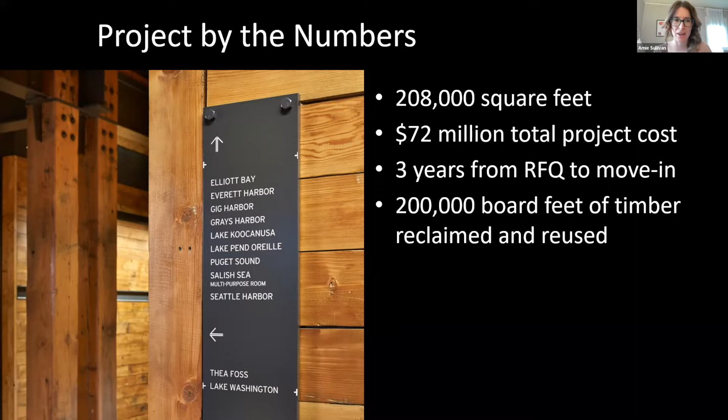So at a high level, this project is just over 200,000 square feet. $72 million is the total project cost, 3 years from when the RFQ hit the streets to move-in. So it moved at a really fast pace. And my favorite stat is 200,000 board feet of timber reclaimed and reused on this project.

I don't nearly have enough time to talk about all the fun details of this project, so my strategy will be to talk fast. Welcome questions at the end or after the meeting if you want to reach out to me. The other thing is I want to make sure that in all the details, the real main points are highlighted that I'll touch on. So I'm going to make those super obvious as we go through the presentation.

I want to talk about the commitment from the team, which was key. I'm going to share the sacred strategy to maximize the reuse of timber and limit the waste. I'm going to talk about the inventory-based design process and the iterative nature of that, which is important to be aware of. And finally, strategies for designing and detailing for efficient fabrication and construction, which is especially important for this kind of material.

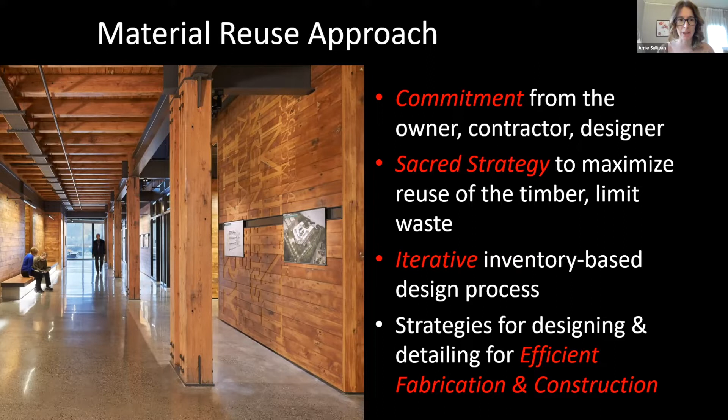So to start out with the team: the owner is the GSA, the tenant is the Army Corps of Engineers, our contractor was Sellen, ZGF was the architect, KPFF did civil and structural, and Flack & Kurtz did the mechanical design. There's a whole other great sustainable story around the mechanical on this project, which I won't touch on at all.

So the 3 points I want to make here: number one, this project was advertised as an adaptive reuse. The language in the RFP said that this project was to reuse the existing 1940s warehouse that occupied the site at the time. That language from the owner really set this project in motion in the direction it ended up in. The second point is our team's response to the RFP included a design that committed to reusing that timber, not just as finishes or furniture or site elements, but as the structural system in the new building, which was ambitious and exciting and a really big deal.

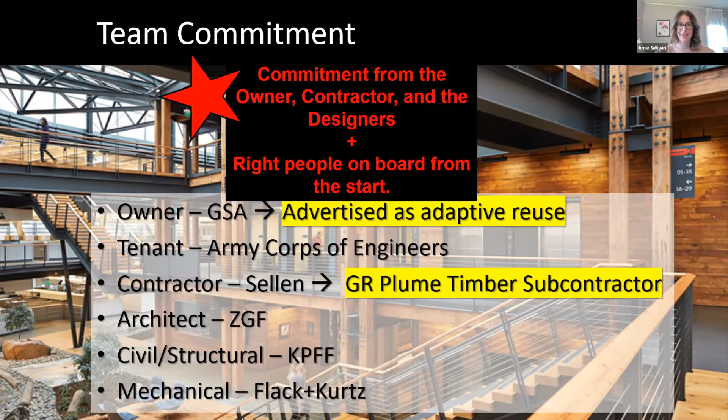The last thing I want to point out here is the day the project was awarded, Sellen brought on the timber subcontractor GR Plume. The point here is that this project would not have been possible without the right players in place at the very start, and having the timber sub on board at the very start was super important. So big point here: the commitment from the team and having the right people from the start was super key.

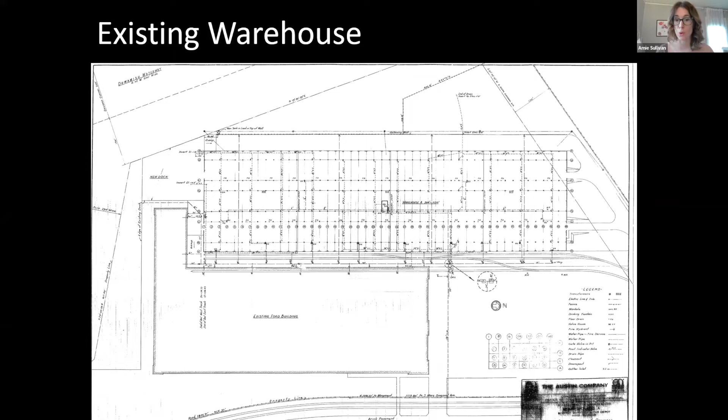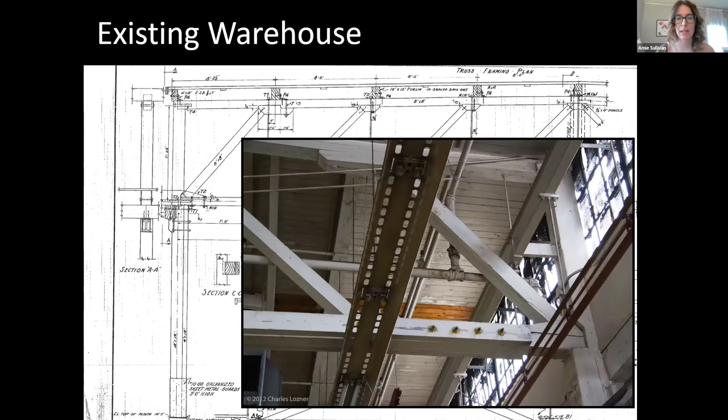Next I'm going to talk about the inventory-based design process, starting with the sourcing of the timber. The thing that was really unique about this project is it wasn't that we decided to use reclaimed timber and then tried to figure out where it was coming from. We already knew what the source was. So from the very start, we could see what we were working with. We reviewed the existing plans, figured out what members were in this building. We toured the site to check out the condition. And at the end of this process, we had a tally of all the members available to us, which is kind of a unique starting place.

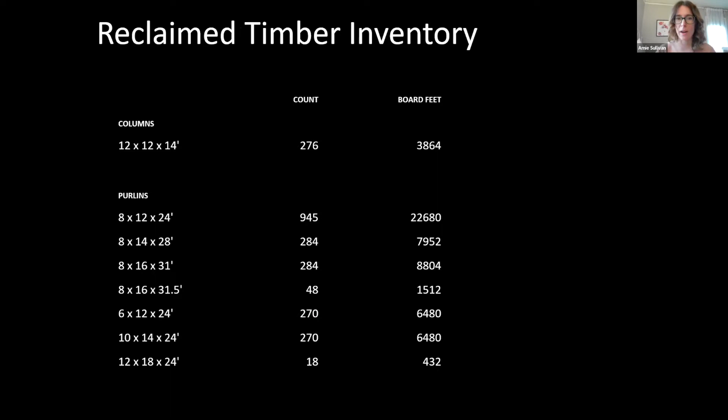I think an important step in the process is to make sure that you can source the material that you're wanting to use. So here is the sacred strategy: when you're reusing reclaimed timber, especially these big pieces, it's really important to not mill them down to smaller sizes because there's so much waste in that process. These big timbers have deep checks in them.

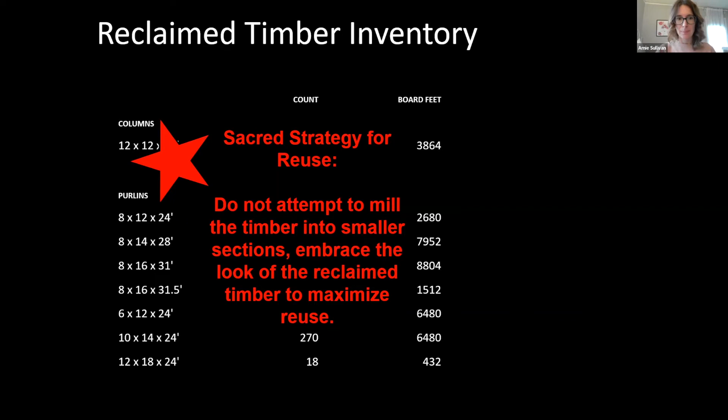As soon as you start cutting it up, you end up with these little pieces that are just wasteful. So you really need to embrace that timber in the form that it's in. So right in SD, we took this list of members and we started to figure out how these pieces of wood were going to work their way into our design.

The system we came up with is a 3-story structure that has a 4-inch concrete topping supported by 2x6 timber decking, which was also reclaimed from the existing warehouse. We've got timber purlins, those are 8x16. We have some steel beams to help us make some nice long spans and create open spaces, and then it's all supported by reclaimed timber columns.

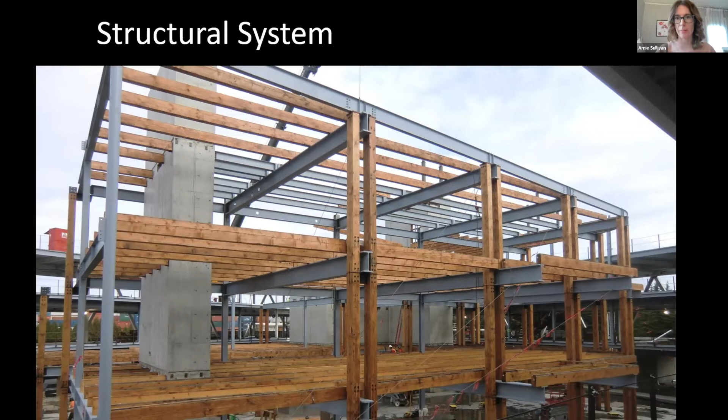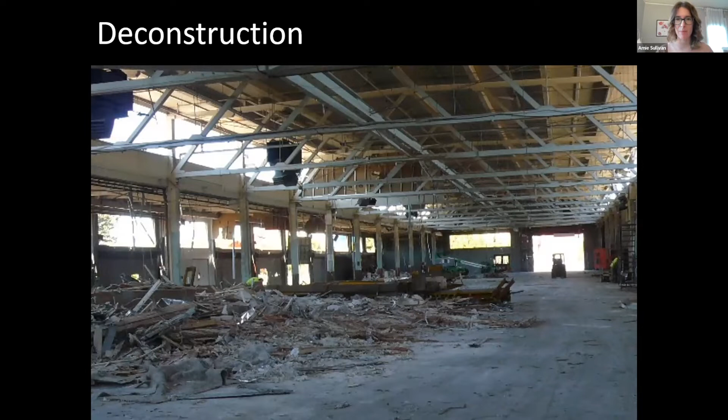Really early on, even apart from just the construction schedule, we needed to start the deconstruction so we could really understand the material we were working with. At this point, we had a list of member sizes, but we really didn't know anything else about the material.

One thing to note is, of course, when you deconstruct a building it's way different than demolishing it. But even so, there's some damage to the members coming out. So one thing we took into account from the start is knowing we wouldn't get the full length from the members, that we would use something shorter so we could cut off the ends where those existing connections were happening, where there'd be some damage and bolt holes. So to have a clean member, we cut some off from the ends, and that helped us set our grid spacing from the beginning.

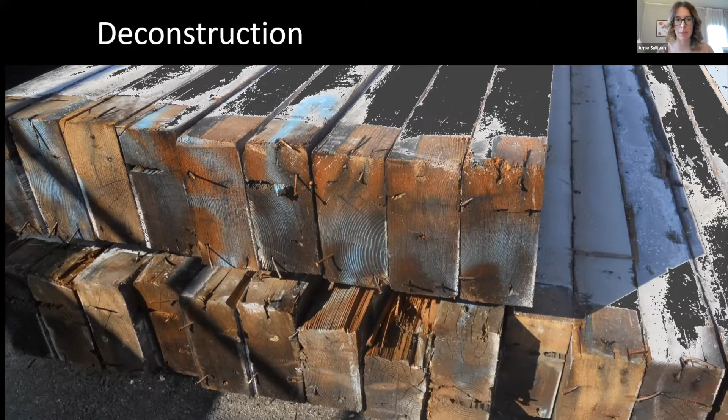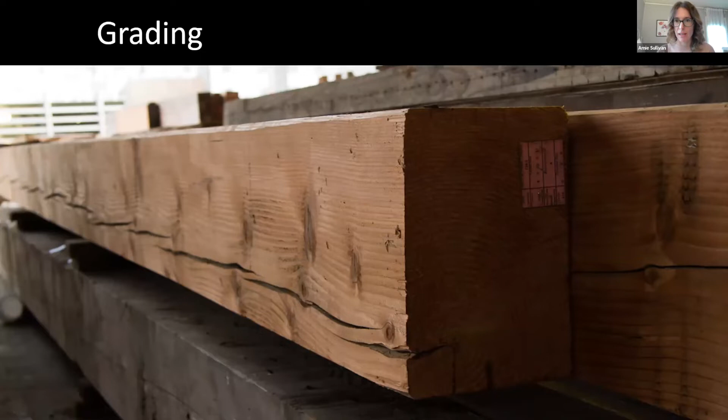So the next step was grading, sorting, and measuring this material. Every member was graded so we understood the strength of the material. It all graded really good. This material is like second growth timber, not old growth. All Douglas fir, it graded out as number 1 and select structural for the most part, which was fantastic.

All the members were tagged with their grading and their piece number and their measurements. And at this point, we had another spreadsheet to work with, in this case a much bigger spreadsheet that had all the details for each piece. We had the length, the height, and the width, but also some really intricate measurements that are kind of unique to this reclaimed timber material, which I'll touch on a little bit more. So we had a lot of detail for each member.

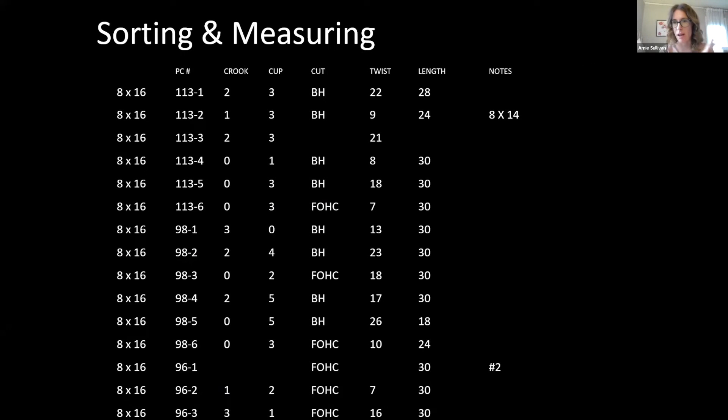The next point I want to make is this idea of an iterative process. We have two parallel paths happening at the same time. On one hand, we're taking stock of this inventory and understanding what it is. On the other hand, we're moving forward with a design based on assumptions about what we think that material is. So you can imagine we need to check in along the way to make sure our assumptions are consistent with what we're finding out about this material. And of course, there's going to be some cases where we find something that didn't work as planned, and we encounter some hurdles.

One of the big hurdles we came across was when we started doing our calculations to figure out how we needed to space these members out in order to carry the loads. Our calculations showed we needed to space them at 4 feet on center. However, we only had enough material to space them out at least at 5 feet to cover the square footage.

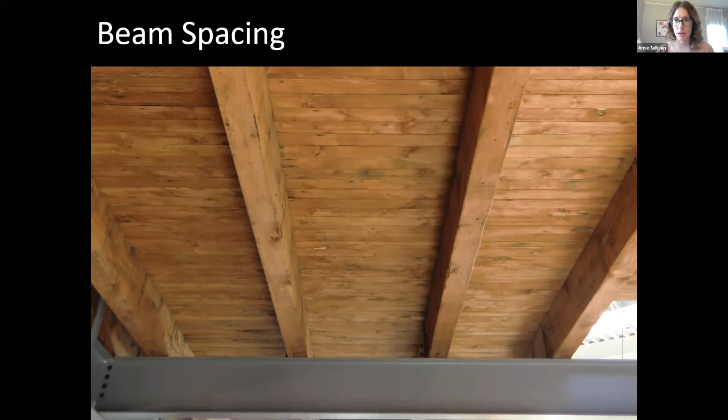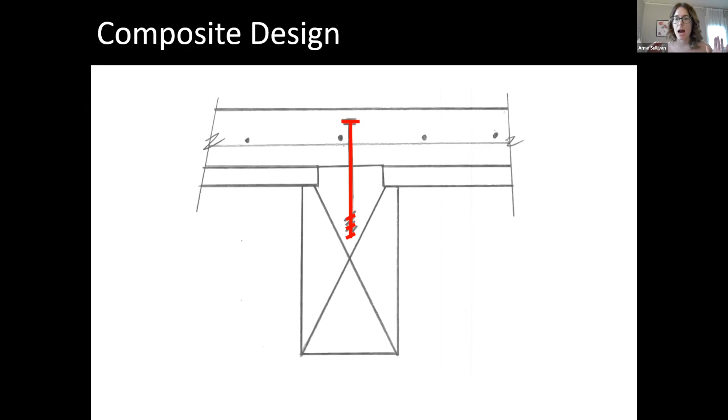So the team came together and talked about the options to overcome this hurdle. What we decided to do was make the timber composite with the concrete topping, which was already in place in the project. We talked about a lot of different ways we could do that, and what we decided on involved just adding a lag screw from the timber beam to the concrete to make those two materials act together. The point I want to make here is this iterative design process creates these hurdles or unexpected situations, and we really need the whole team's input, and we have to unfold that whole process to find the best solution.

So in this case, the solution really prioritized what made sense from a construction standpoint and a fabrication standpoint, and that was deemed to be the best solution. From a design standpoint, this

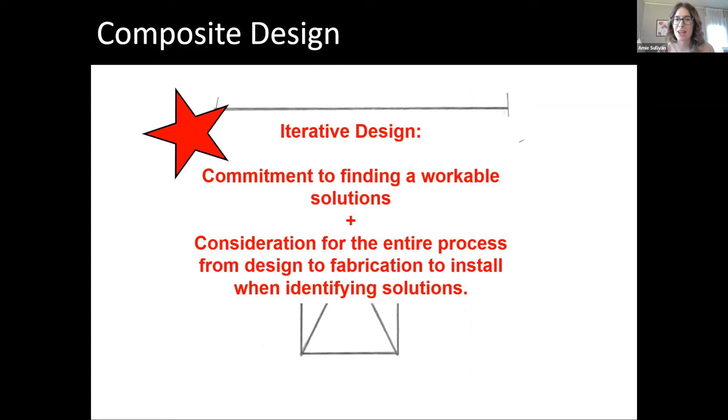solution hadn't been vetted or tested in the United States. It's not codified. So in order for us to do what we needed to do on the design side, we had to create a test program. So that's what we did. We built some specimens and we tested this idea to make sure that it would work for us.

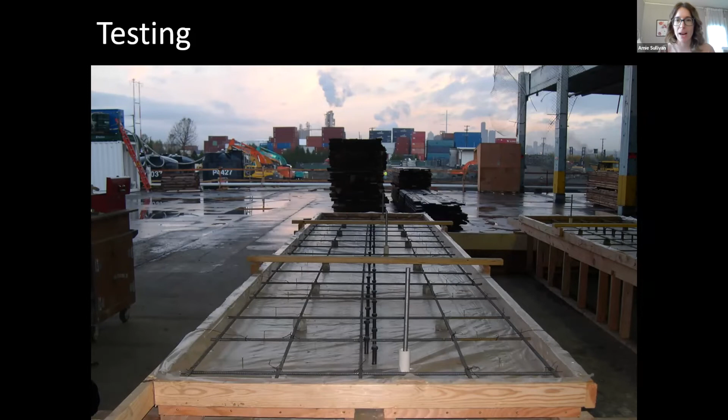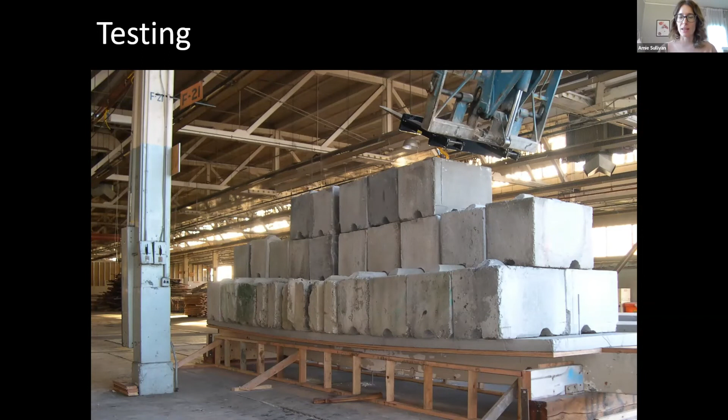So the last thing I want to touch on is the detailing and the fabrication. So at this point, we have this really great supply of timber. We've got a design that uses it really efficiently, but now we have to figure out how to implement it in a way that really makes sense from a fabrication and a field fit up standpoint, so that this project doesn't take forever to build, that it can be built in a way that's economical and works with the schedule.

The challenge for this project, I would say, is twofold. One, all of the connections are exposed, so it has to look really good. And number two, and this is something that's unique to the reclaimed timber, is these are big pieces of wood that over time, as they dry out, they warp and they shrink and they twist. And so we have these pieces of wood that aren't square and true, and we have to figure out how to incorporate them into a new building in a way that looks good and fits up well.

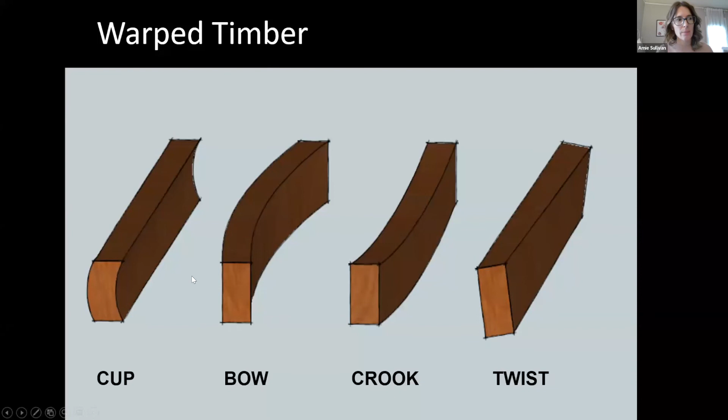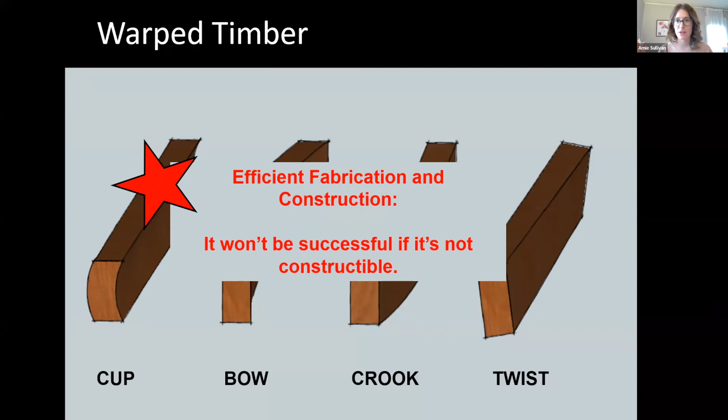So this is what that looks like. It presents itself in cup and bow and crook and twist. So we've got these really twisty, kind of crazy members. So the big point here is, as we're solving how to do this, we just really need to think about the efficiency of the fabrication.

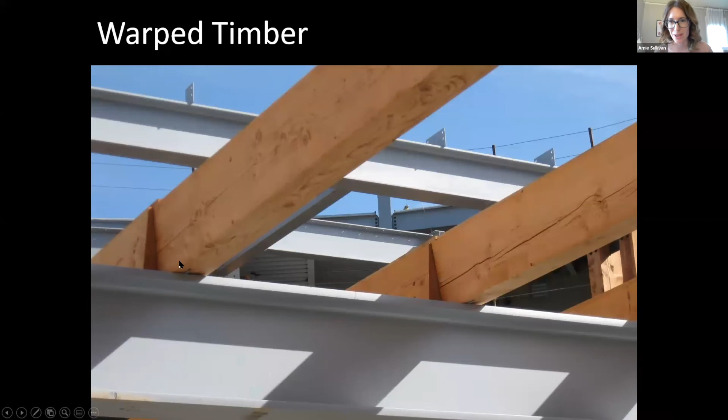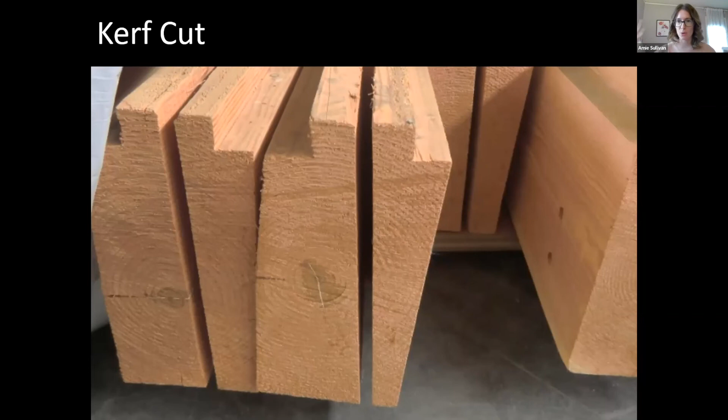So here are some of those beams fit up. I wanted to show this slide because it really exaggerates the twist of those beams. And because of that, the decision that we made early on with the input from the timber subcontractor is that we weren't going to try to fit up those members with any kind of buckets or side plates. That's a really common connection for wood, is you kind of put a couple steel plates on the side and you bolt it together. But with the twist of those members, that just wasn't going to work and it wasn't going to look good. So we came through and we created these kerf connections that could go vertical, and then the twisting members could just twist kind of independent of what that connection was.

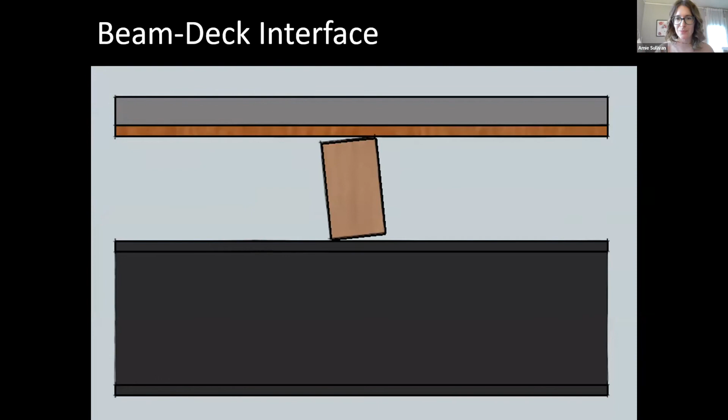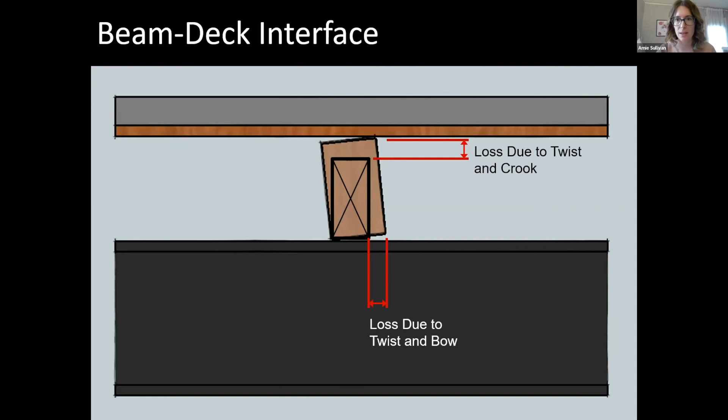So the other trick was how to put a flat level floor on top of these twisty members. So you could mill it down to something smaller, but in order to get all these members square and true and kind of equal size, you would just have so much loss that it wasn't going to work for us. So the solution was to just create these little notches at the top that were just big enough to get the job done.

And so I personally had to go into that great big spreadsheet and figure out what that notch needed to look like, how big it needed to be, so we could set a top of steel elevation and a deck bearing elevation. And that was like a weeks long process to try to figure out how that was all going to work.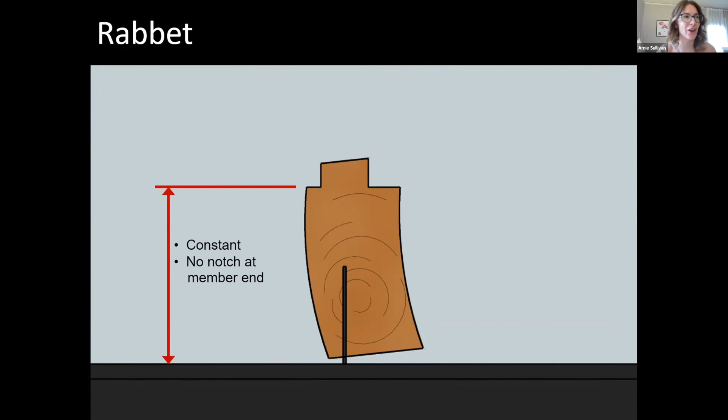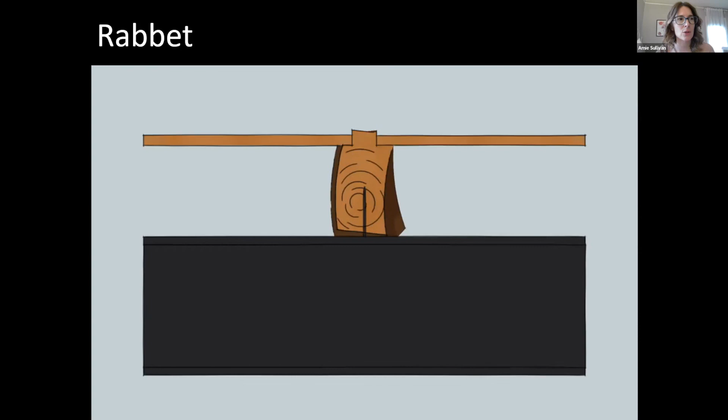We set it so we didn't have to notch anything. It just got shimmed up at the bottom. And this is what that looked like on these kind of warped, twisted members. And it fit up super easy, dropped into place, the decking, the lag screws, and the concrete. And then we had our nice flat level floor.